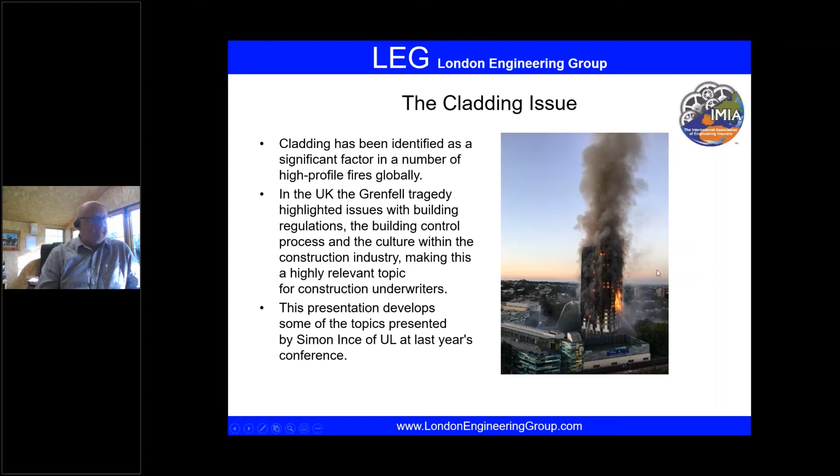So the paper itself considers the cladding types and technical aspects, focusing strongly on fire rating and types of insulation, and Mahmoon will talk us through that today. It looks at general risk management in terms of the influence and understanding of applicable building regulations, and the resilience of buildings that are impacted by their design.

On insurance coverage - it's interesting that cladding issues have impacted many lines of business, not just property, which is obviously very high profile, but also construction to a lesser extent, IDI, and professional indemnity. So we'll look at some of those issues, the underwriting considerations already mentioned, risk engineering, and I think what's really interesting - some of the claims statistics. We'll move on with claims as our starting point.

So the group identified 75 cladding-related fire claims since 1973. The earliest claim looked at is the Summerland disaster in the UK - the fire at a holiday complex on the Isle of Man killed 50 people and led to changes in the building regulations in the UK.

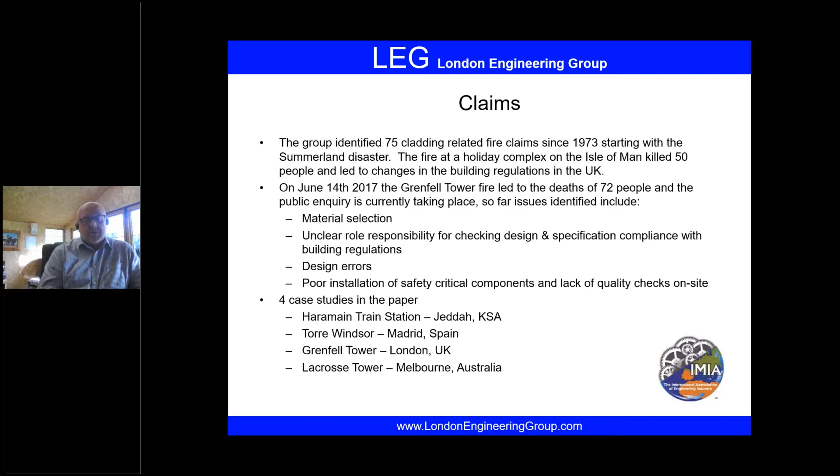We're looking at 4 particular case studies in the paper. Grenfell is one of them. The others: 2 construction losses - the Haramain train station in Jeddah, Torre Windsor, which is a slightly older loss in Madrid, Spain, and also the Lacrosse Tower in Melbourne.

Just to show that this remains a very relevant topic, we're aware of two recent claims that we've added to the log. A hospital under construction in Kuwait caught fire in September. We know cladding is a factor in that fire at the Al Sabah Health Zone in Kuwait City, and reports say it was also contributed to by poor material storage on site.

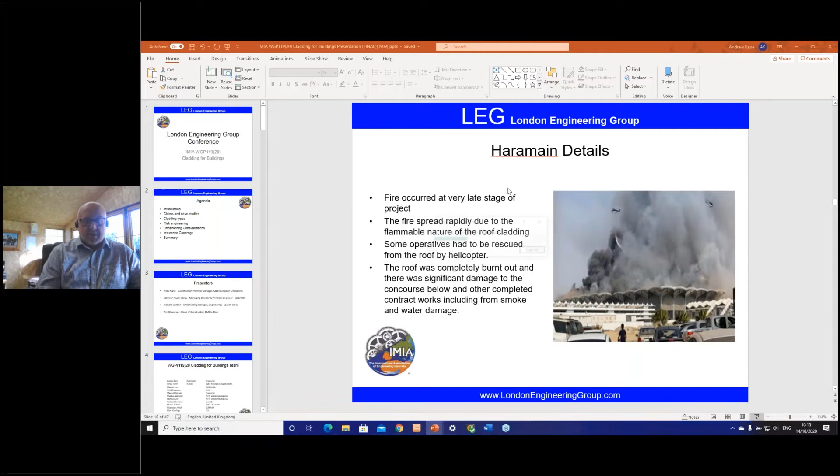And then last week, a rather spectacular fire in South Korea in an operational apartment building. We're going to see if we can get this video to work so you can have a look at it. Hopefully everybody can see that. Sorry, let's take it back to the start.

So this is a fire that spread very rapidly across multiple floors of this apartment building and hotel in Ulsan, South Korea. Fortunately, no casualties or fatalities as far as we're aware. You can see that characteristic of a cladding fire, burning debris showering down and floating around the area. This was a 33-story apartment building, and it looks like the cladding contributed to extremely rapid fire spread. It's believed to be aluminium cladding, similar to that in the Grenfell Tower.

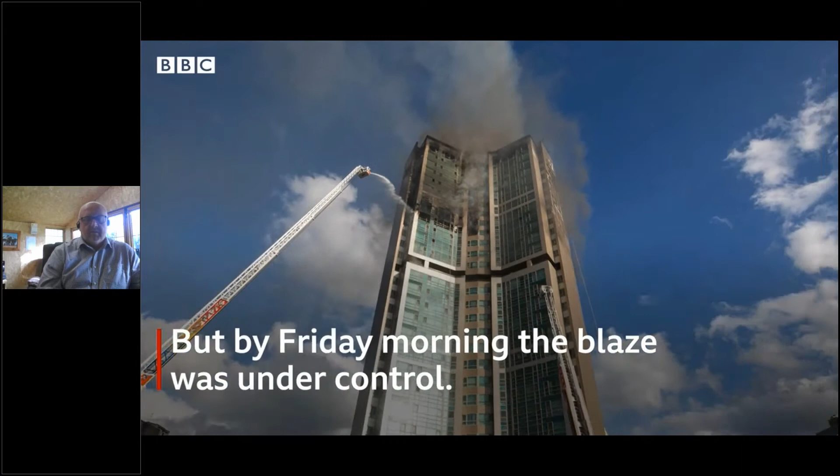One of the things we looked at was cladding fires over time. What you can see is that prior to 2007, there were not cladding fires every year, and they were relatively infrequent and rare. However, that may be because of lack of reporting or records not being available for more than the largest and highest profile losses. From 2007 onwards, there are recorded fires every year, and it looks to be an increasing trend when you look at the numbers per year.

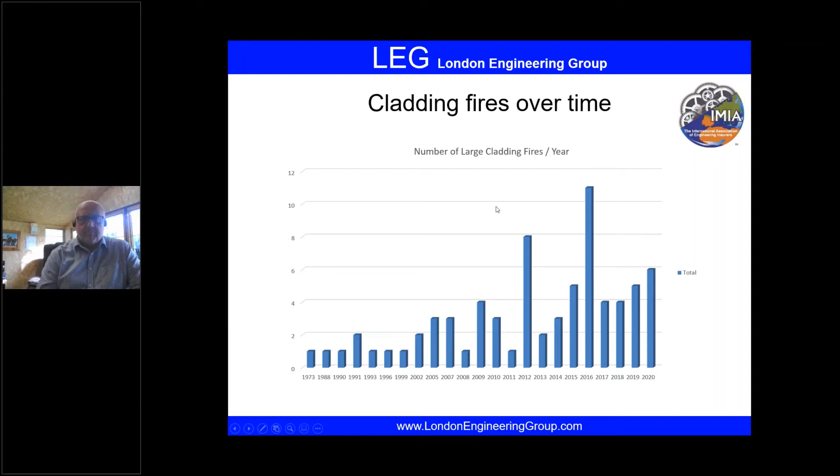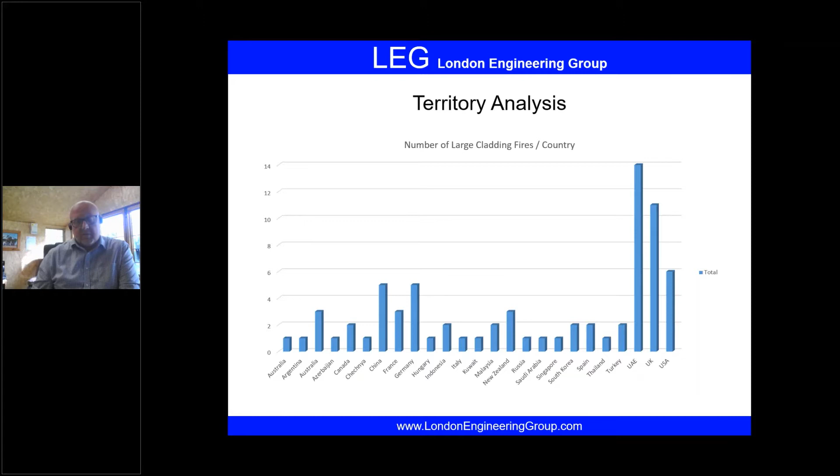In terms of territory, you can see that it is an issue that has touched many countries over the world, but there is a clear cluster of claims in the United Arab Emirates and also the UK.

When we look at occupancy, we could see that there are a number of occupancies that have been impacted by fires, but by far the highest are residential and then also industrial. So we would always potentially consider residential as a lower risk fire occupancy for construction, but you can certainly see that it has a high incidence of cladding fires.

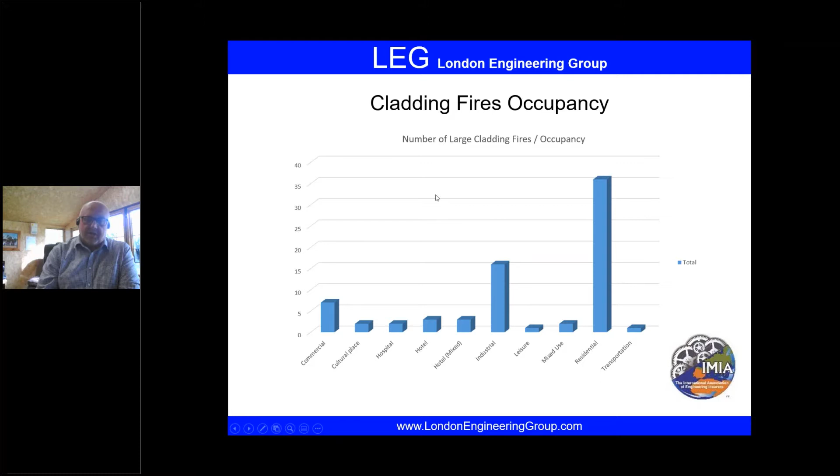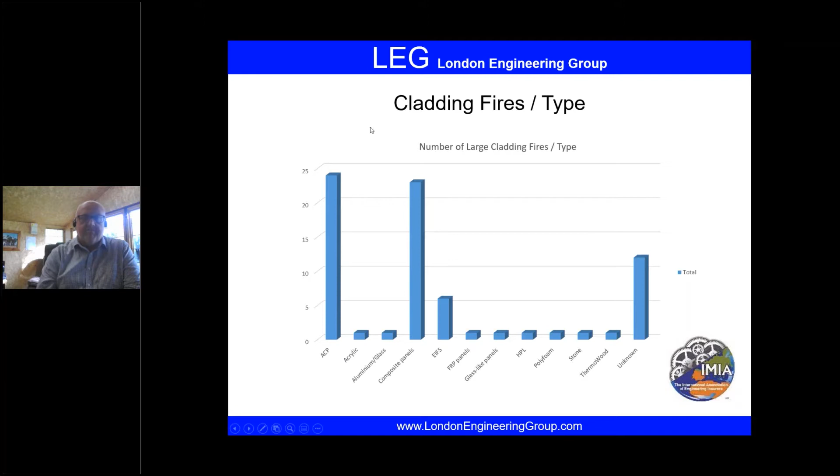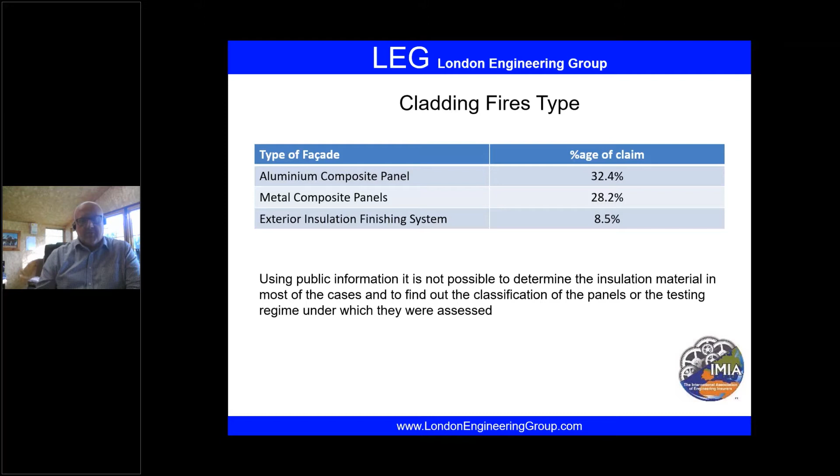In terms of type, this is harder to determine accurately because we're taking everything from publicly recorded information, but you can see that aluminium cladding panels and what are described as general composite panels feature significantly in the large fire database. There you can see that the aluminium composite panel is approximately a third of the claims, as are the other metal composite panels. Similar with exterior insulation finishing system coming up on third. As I mentioned, it was not possible to determine the insulation material in most of the cases, or to find out the detailed classification of the panels or testing regime under which they were assessed.

So with that, I'm going to hand over to Richard Gordon, who's going to talk through one of the case studies in the paper, the Haramain train station in Jeddah. So Richard, will you be able to turn your camera on and unmute yourself? Yes, indeed. Thank you, Andy. Thank you very much, and good morning, good afternoon, good evening all.

I'm just going to discuss the Haramain station risk and the fire incident from September 2019. The Haramain station railway is part of the 7.3 billion scheme that was partially inaugurated in 2019, and it connects the Muslim holy sites of Mecca and Medina with the Red Sea city of Jeddah, with high-speed trains traveling up to 300 kilometers an hour. The project aligns with Crown Prince Mohammed bin Salman's vision for 2030, and there's a lot of ongoing change in Saudi Arabia, making it a very exciting country for the future.

So the fire happened at a very late stage in the project. Some of this may be approximate detail, but the project was virtually in handover mode and ready to be put into an operational BI program. What happened was there were ongoing elements of work going on the roof, and that, whatever contributed, started the fire. What is quite scary and frightening is the speed at which this fire spread throughout the structure. We've been talking about vertical cladding, but this is actually horizontal cladding, and I'll show you in the next picture how the landscape of the roofing configuration looks like.

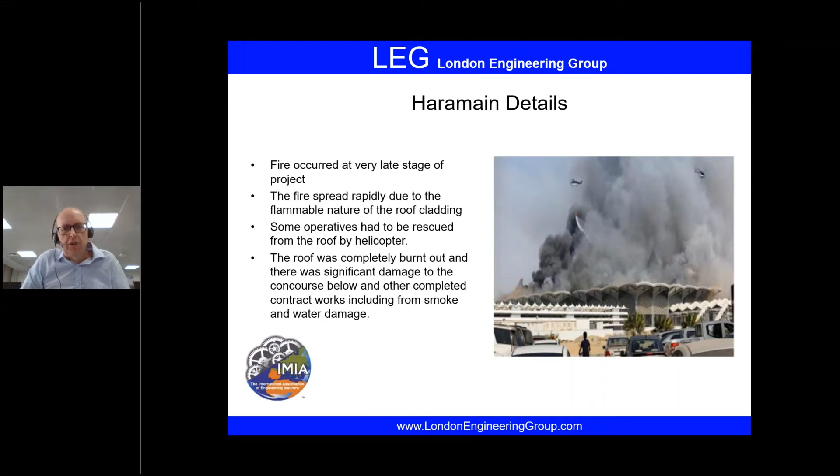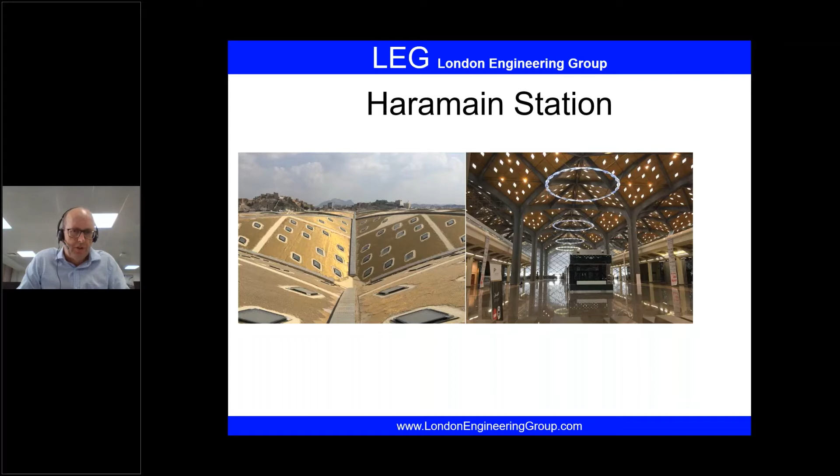Now let's talk about the impact of the size of this fire loss.

Going back to the picture, the roofing material was combustible - expanded polystyrene foam and polyurethane components. There are no actual breaks in the structure or uniformity of the panels. So with no fire break, strong winds, and a source of ignition, the fire completely burnt through.

Now the station will have to be rebuilt, as it's part of many similar structures on the project, within the time frame of this project which started in 2011. Saudi Arabia is also changing its cladding specifications and civil defence building specifications.

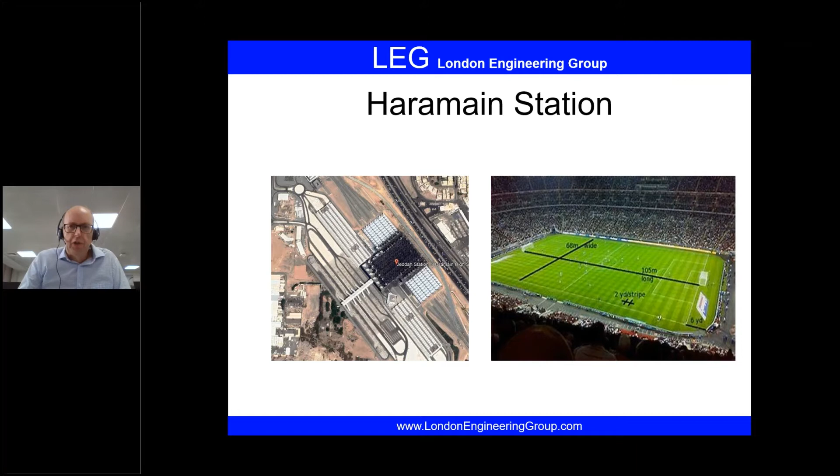What I'd like to do now is show you a couple of videos of the project, taken from YouTube. One shows the fire ongoing - Andy will drag through to the key elements.

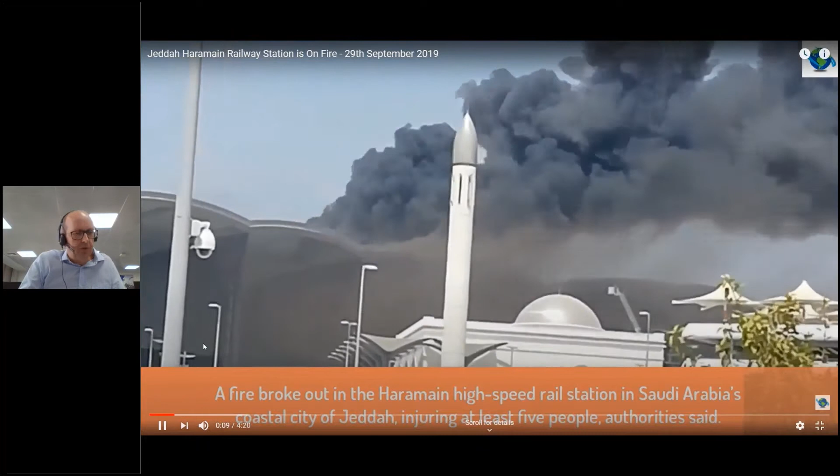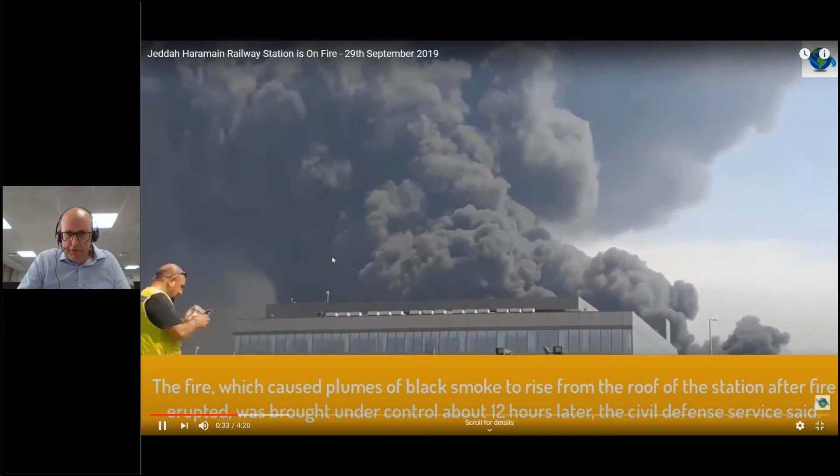We won't have sound, but you can see the black, acrid, toxic smoke, high heat release, and intense, fast spreading fire. It's very corrosive and toxic, difficult to put out, and it burns just like petrol and gasoline.

I think it was a burnout philosophy really once the fire brigade arrived on site. Fortunately the best news is that loss of life did not happen, but people were taken to hospital, and there were people rescued off the roof.

It's quite frightening how this happened from a simple, possibly innocuous hot working process going on the roof structure at the final stages. And it burnt all day and all night.

So the next video is when the fire brigade and people actually gain access to the destroyed concourse location.

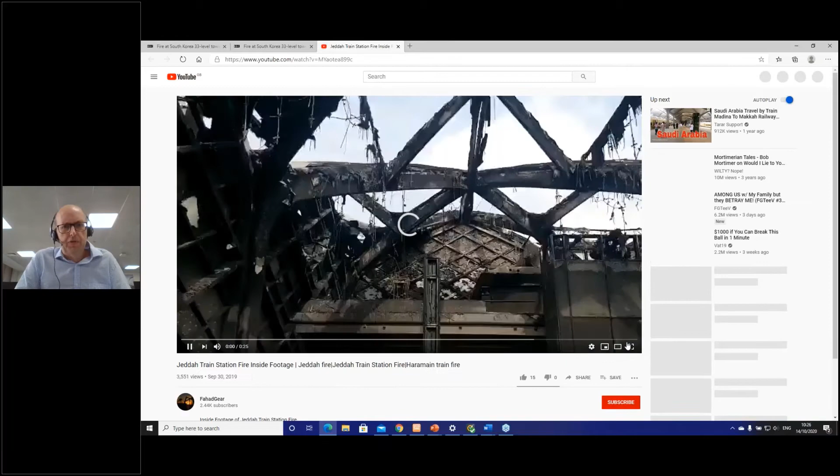What should also be said is that the project was in its final stages - you can see the ticket machines. I'm aware of claims not only to the construction project, but also to utilities and providers for the permanent works under our operational program. If you get access to this presentation afterward, you can listen to the sound of debris and people walking along - it's complete destruction.

The consequences are that it has to be rebuilt, with insurance coverage for the rebuild to new standards and all the various criteria the principal has to decide. Then we have the consequence where we come in as underwriters and insurance people with the insurance policy for the rebuild. I think that's just a snapshot of how serious it can get.

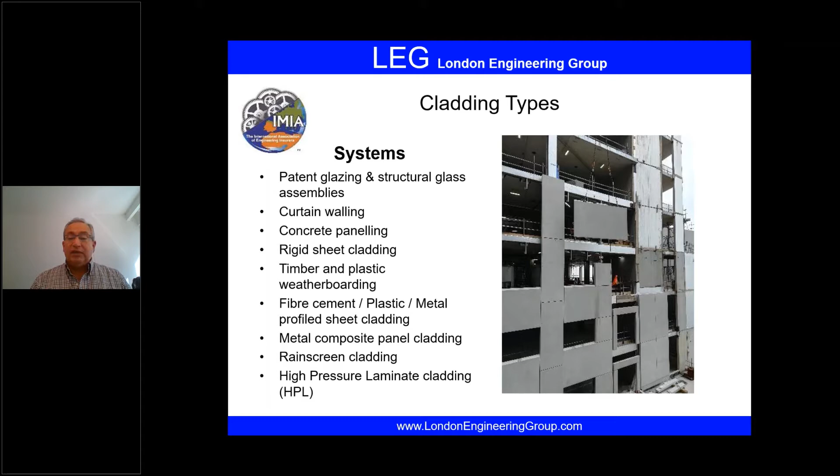So on the next slide, we come to really define what the problem is and where we need to worry. We need to worry about a certain type of cladding with a core that is made of a material that is combustible. Now, not all of it has to be aluminium composite panels.

They don't always have to be aluminium. In general, when we talk about cladding of concern, we're talking about a composite panel, or what is referred to sometimes as a sandwich panel. Basically, we have two thin layers of metal, and right in between that metal, we have a core material that is used to actually provide some sort of strength and protection against wind loading in the material. So it is a construction component that is very, very important for the construction, and it provides quite a bit of protection to the building.

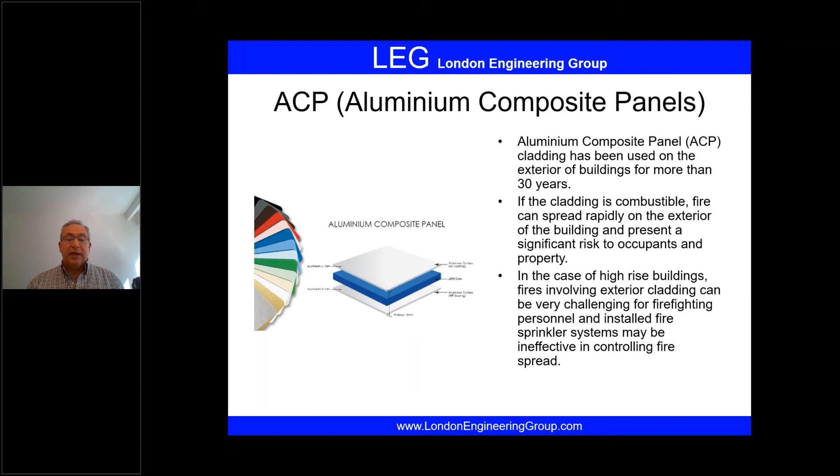The problem, or what we really need to worry about, as the next slide shows us, is the core material. What is the core material that is used? Before we get to that, let's go into the different types.

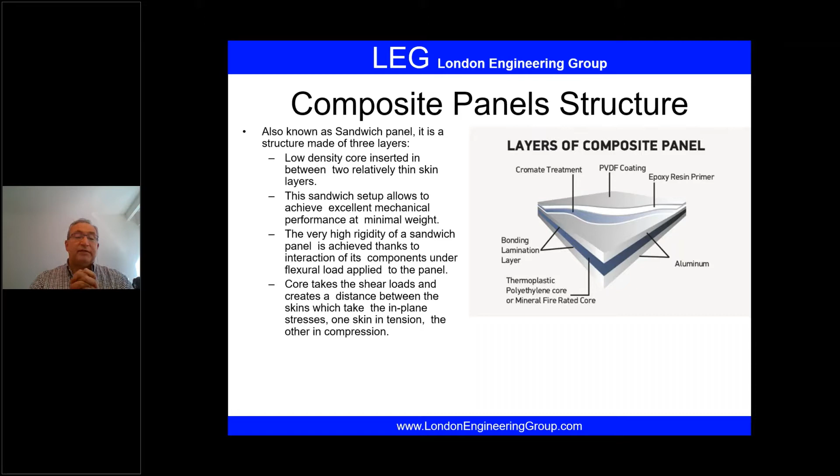Let's talk about where do we expect to find these composite panels. Some of them, and the majority actually, are found outside on the external cladding on buildings. There are different types of cladding and different types of material, but they are very, very common on the outside.

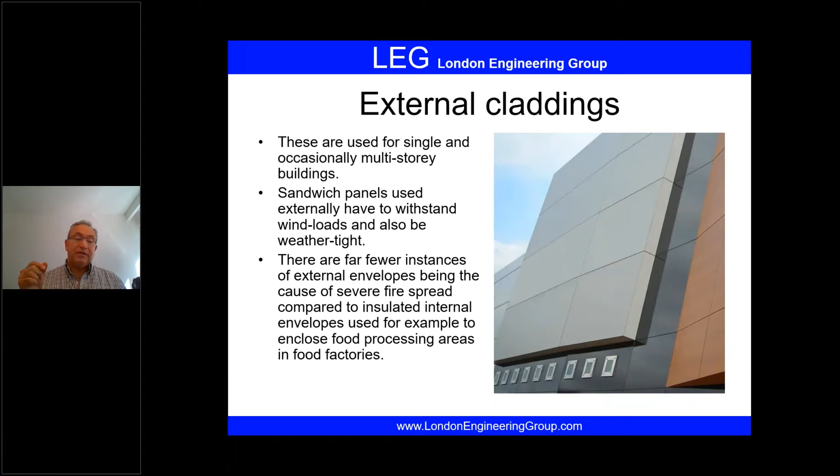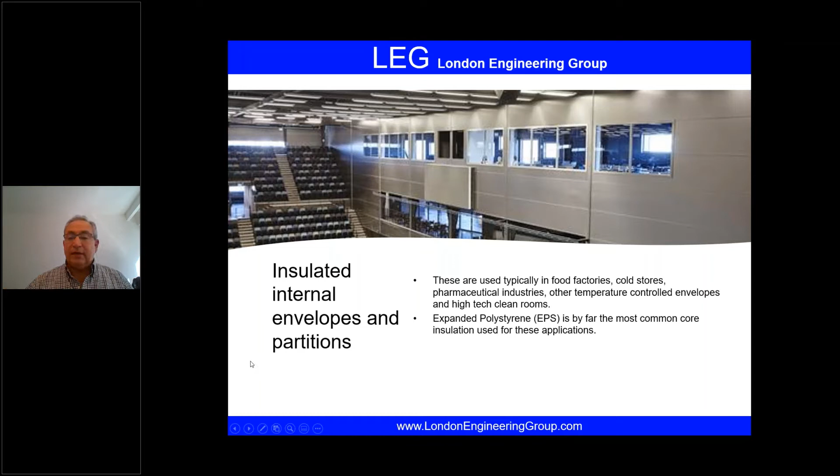Now let's go and start looking at the type of core. There are many different types of cores. We worry about two or three of those that tests have shown are very combustible and have very little fire resistance. Unfortunately, they are the most widespread, or widely used, in the industry because of how cheap they are and how rigid and good quality they can provide to the building. Let's look at those one by one.

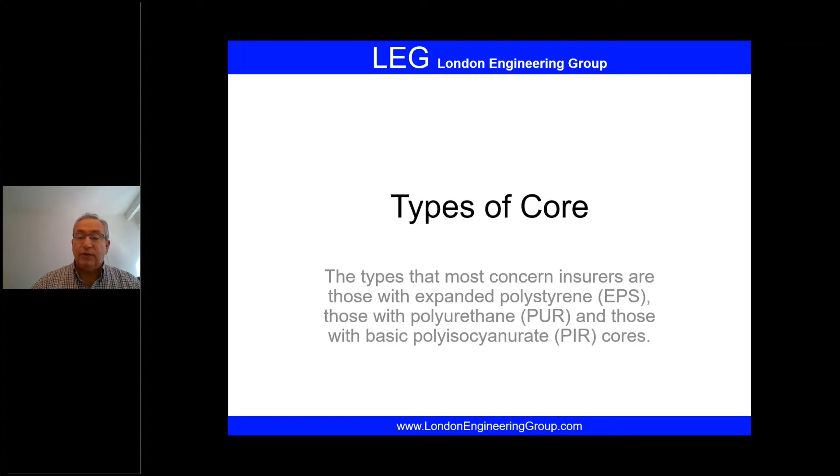Let's start first of all with the polystyrene. The polystyrene should always be treated as combustible. As I describe these cores, I'm going to try to mention some testing standards we need to be aware of. These testing standards and their results we took out of the presentation, but they are going to be in the paper, which talks about the testing standard and how it applies. That's really important to keep in mind, because there are quite a bit of different testing standards, classifications, and descriptions of this material. EPS is by far the worst because it has absolutely no fire resistance. It feels very similar to packaging material - if you order something and it arrives, it will have that polystyrene inside it. Unfortunately, it is very common and used quite a bit.

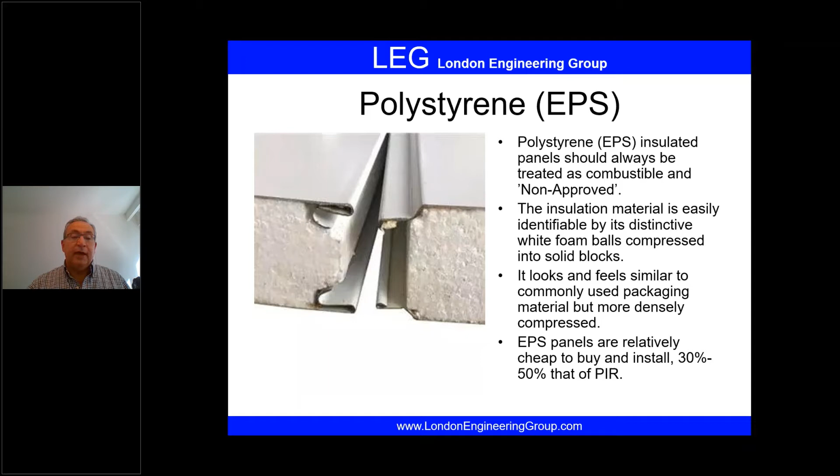After that, we talk about the polyurethane. In some instances, the polyurethane is actually a little bit more dense and a little bit thicker or heavier. Because of its density and the type of material, it does actually provide some fire resistance, but nothing to speak of - nothing really serious to acknowledge or think of as fire resistant or fire retardant. Now, it is sold as panels with enhanced fire resistance.

That's a term that is used by some manufacturers. It doesn't really mean anything in terms of testing results, in terms of fire resistance, and in terms of the ability to resist fires and to provide any protection. Remember, we talked about testing standards that have to be met, and testing standards that decide if the material is good and applies, is combustible or non-combustible.

Unfortunately, as these panels are sold, and we have run across this situation in many places and many countries, they are often sold and presented as either fire retardant or fire resistant. Nobody says it's non-combustible, but they add these little terms on them and they don't mean much.

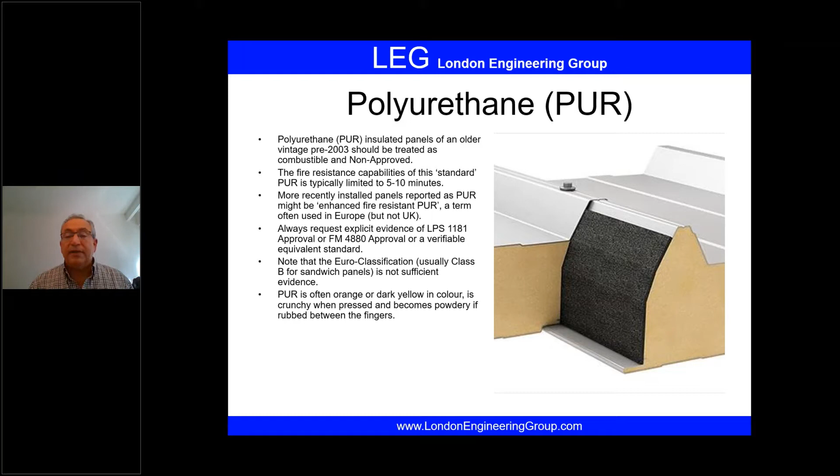If we look at these two types and the burning characteristics for the EPS and the PUR, you'll notice that when these panels are exposed to fire, the adhesion holding the thin skin panels around the core starts breaking off and getting consumed, and starts failing. When the panels or the metal start opening up, the core catches fire and spreads very aggressively. In most cases, with these two types, the buildings become involved in the fire very quickly, and you can bet it will be a total loss, especially if you find them on the walls, outside and inside, and also in the roof panels.

So when you find them in all these different locations, once they catch fire, just like Richard demonstrated in the case in Haramain, you will notice that it will spread very rapidly and very aggressively. It is very difficult for the fire services to actually control it.

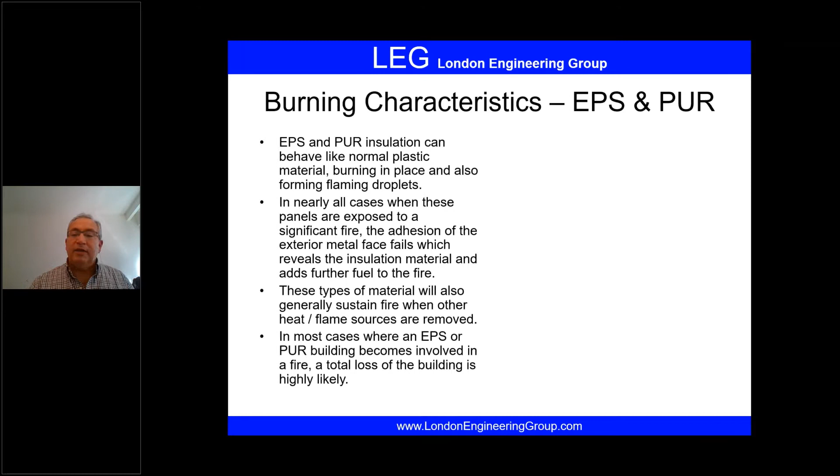Now we come to the PIR. The PIR is better. It's a form of polyurethane with significantly increased levels of fire retardant. Most PIR panels, underline the word most, not all, will actually be LPS 1181 approved and/or FM 4880 approved. Again, in terms of a construction project, we need to actually request and see evidence, because not all are approved. The majority of them, or many of them, are approved.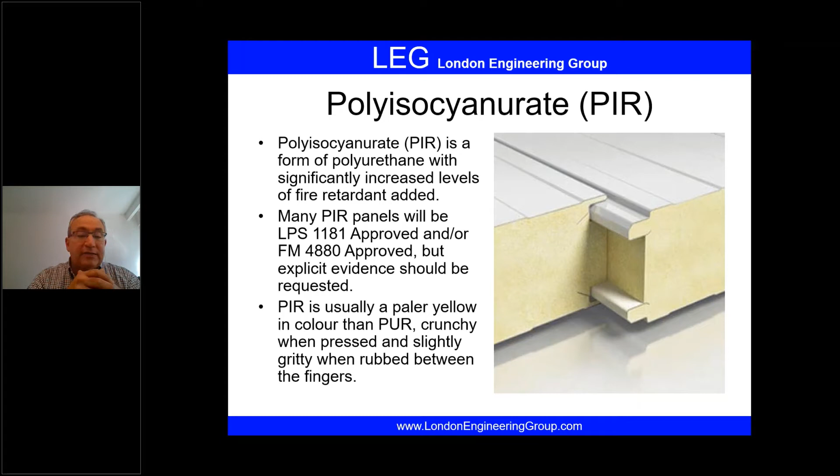The burning characteristics for the PIR in the next slide will actually tell you quite a bit of what you need to know about it. It has a much better fire performance than the EPS or the PUR.

Because of time constraints, we have to take this testing information out. But fire performance relates to several characteristics. One is how long before it catches fire. When it catches fire, how quick does it spread? And one very important characteristic, which we have observed in most cladding fires, is how much it will spread the fire. Does it form burning droplets that will actually spread the fire beyond the building to adjacent buildings and other locations?

Like Richard showed, the ticketing area inside the Haramain station, all of that was from falling debris or falling burning material, which caught additional fires and caused damage to other parts. So the burning characteristics are always studied in terms of these testing results, and you can decide if the material has good burning characteristics or not.

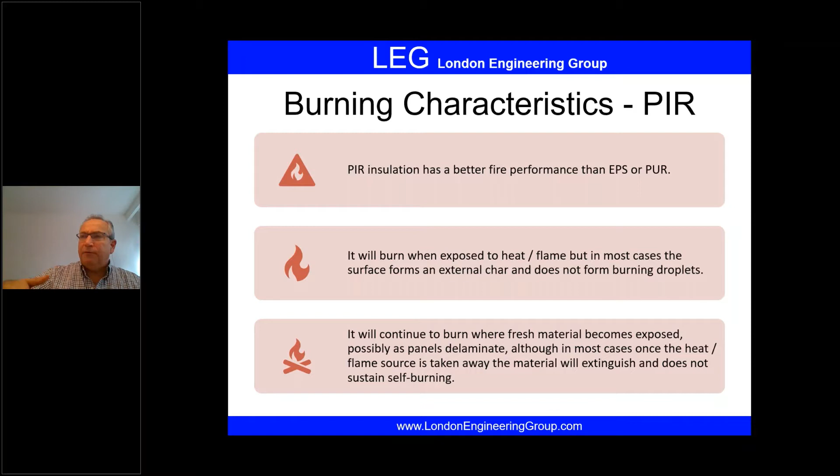Now, in the next slide, we bring in the material. Not all material is a problem. We have material that is really, really good, modified phenolic, MPhen. This is material that is actually approved, most or all of it, and it's treated as an effective non-combustible core. Guess what? It's very expensive as well. So not a lot of contractors or suppliers or projects would actually have it put in.

So that's where you really need to find out what is the type of the material and whether it has been tested, or does it comply with the standard.

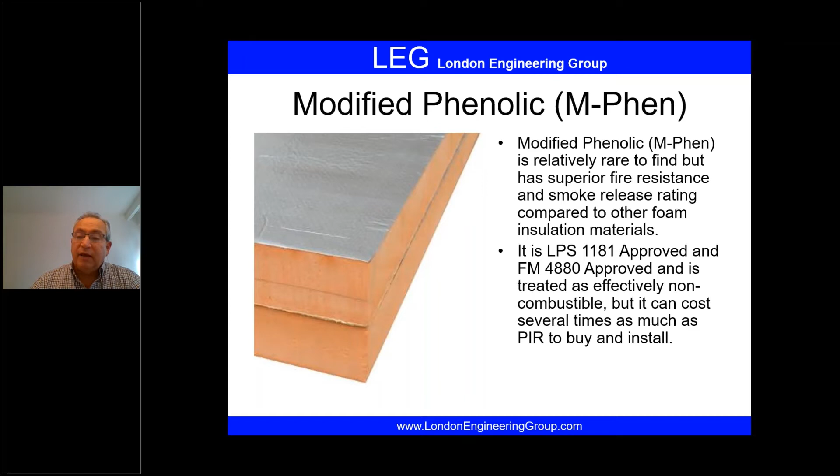Another kind, which most of us are aware of, is mineral wool. Mineral wool is a type of insulation made of stone wool and glass wool, and it is non-combustible. So it's very, very good, excellent insulation. It's heavier, and at the same time it's also very expensive. That's why you don't find it as common.

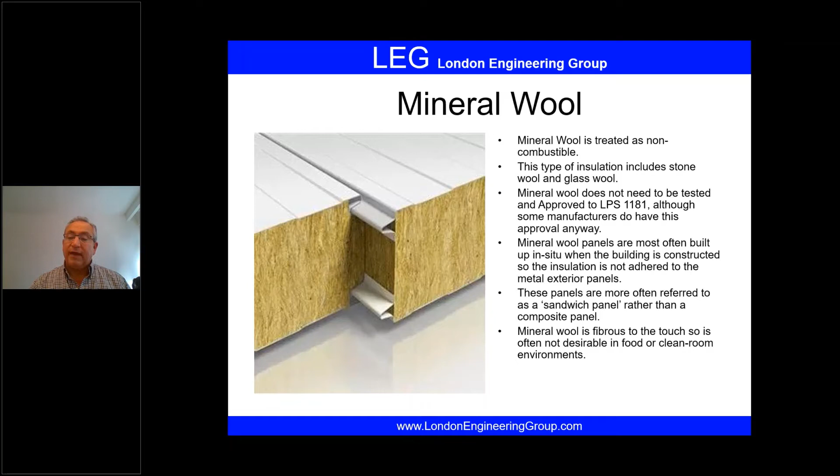Now, if you look at the burning characteristics summary on the next slide, you'll see the test results. You probably won't be able to see this because of how small it is, but it will be in the paper. It's a published table that compares these different types in terms of cost and fire resistance in minutes—how long before it ignites and breaks away or disappears. It will catch fire, but what happens to it? How long will it provide some resistance? And what's the probability of fire spread, based on whether the fire grows within the core or the panels themselves, and whether it starts dropping burning droplets or parts that ignite fires in different locations.

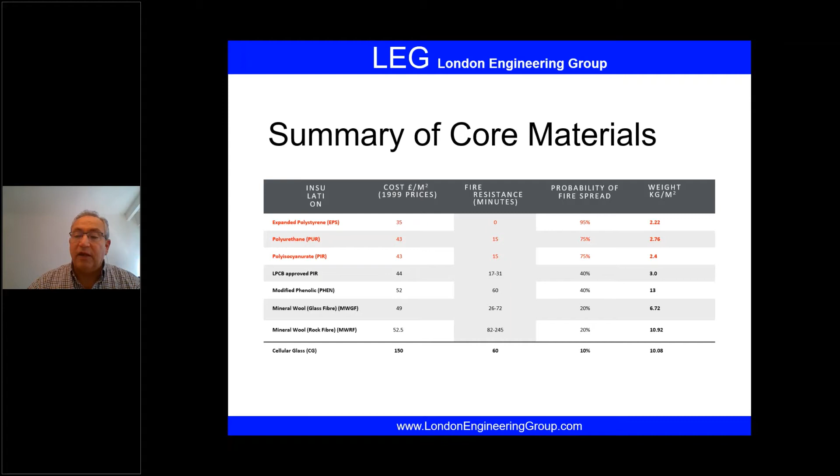So what do we do as risk engineers? How do we tell? If it's under construction, it's very easy—we just ask for the certificates, look at it, and decide what's going on. We go to the warehouse, look at the type of panels, and see it.

But sometimes we're dealing with situations where we can't do that because it's an existing building. It's very difficult to look at a building and decide what the core type is. I've had that problem, and I'll go around looking for somewhere that someone forgot to fill in an opening, just to peek in and see what material is being used. I typically look at openings in the wall for fans in warehouses, or windows, where you can look inside and decide what the material is.

And that is the difficulty, because in most cases when I ask somebody, 'Can you show me the certificate for the panels,' even in recently built warehouses and buildings—as recent as 5 years or less—nobody has the information. Nobody knows what's actually going on, and nobody has anything they can share.

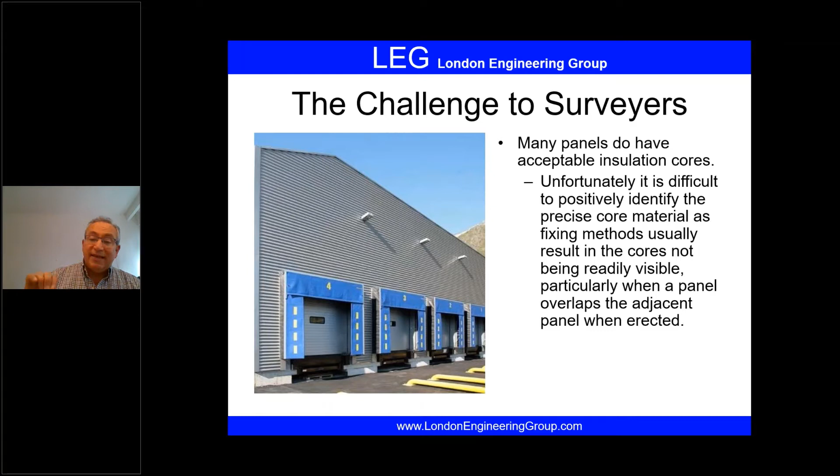So to assess the risk, and this is very important, we need to determine what the type is. We need to establish it one way or another. We need to try to find it. If we don't find it, we need to go and start asking questions. In many cases, especially recently, you will find a lot of that information available in various locations.

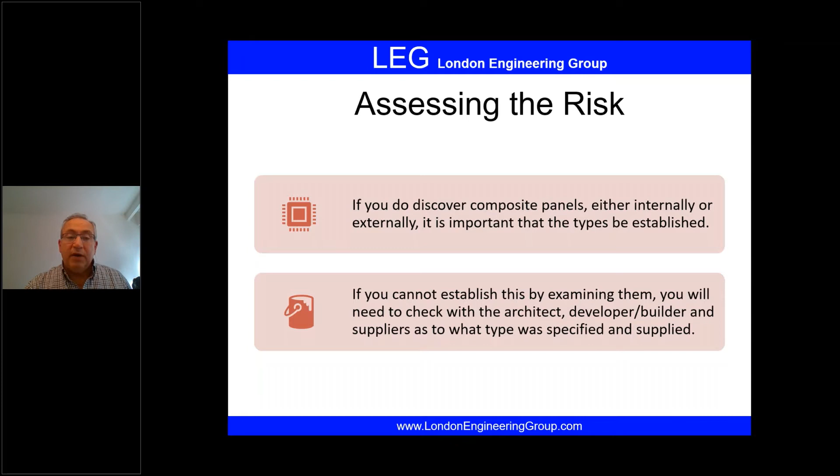I just want to remind everybody that the fire problem is not a cladding problem. The fire problem is a much bigger problem. Cladding is only part of it. Compartmentation, fire protection, occupancy—all of these things are part of the fire problem, and it has to be considered that way. We can't just focus on the cladding and say, 'Oh yeah, it has mineral wool cladding, therefore this building is safe.' There's a lot that has to be considered—how the cladding is installed, what it does, and how it does it is very important.

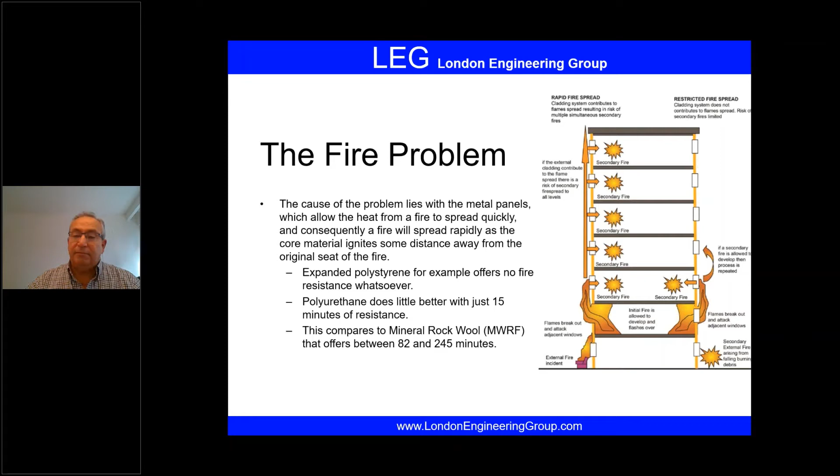Now, a lot of people and underwriters will ask whether it meets building regulations or not—that's very important. Through investigating some serious fires in different countries, we've discovered not all regulations have been updated. Regardless of all the high-profile cases that have taken place, and everybody knowing about the problem, not all countries have actually updated their building regulations. Building regulations in many countries remain behind on that situation. It's unfortunate, but that is the fact of the matter.

In addition, we also have problems related to manufacturers using terminology that doesn't really represent the facts. So there are a lot of things to consider. I'd suggest you reference the testing parts and testing standards in the paper we've captioned, because there are so many of them—it's not just a British standard, not just European, Euroclass, or an international standard. There are so many, and they all test different things and report in different ways, so you really need some understanding of how these apply and work together.

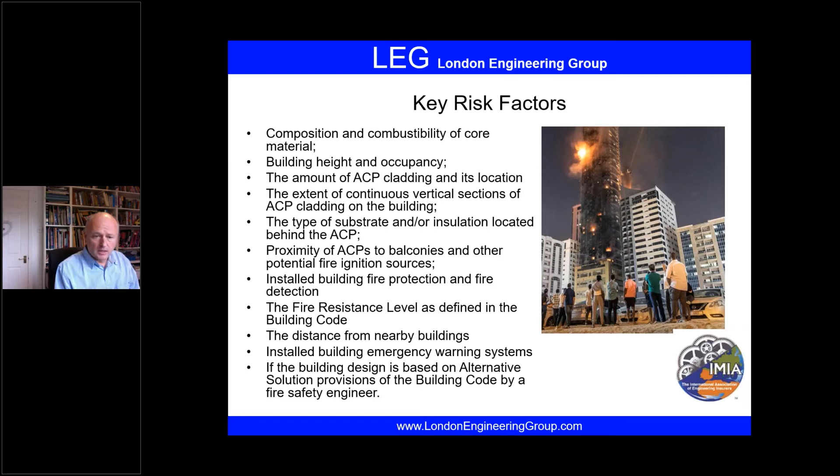So if you're looking at cladding stability and issues of waterproofing, then you need to have a good view as to who's done the wind testing and are they reputable.

Now with a high-rise building, with cladding, there's going to be repeat design. So it could be one panel, one fixing that's repeated throughout the structure. So you should consider repeat losses, or is a series loss clause applicable here?

And consider issues relating to the cladding panels if they're not fire resistant, or if they're below fire resistant. If you have that, then there's a greater likelihood of the cladding catching fire in the first place, but also through spreading throughout the building.

And if you look at your PML scenarios, if your building comprises of several buildings, there's a higher potential for fire spread between the buildings because of more intense heat, and the likelihood of the cladding on adjacent buildings will be more susceptible to catching fire. So that could alter your fire PML scenario.

And with a fire inside a panel, it might take longer for the site team to be aware of the fire. And once they are aware of it, it can be very difficult to put it out because it's within the aluminium cladding. And when we look at the manufacturer, do we know the name of the manufacturer?

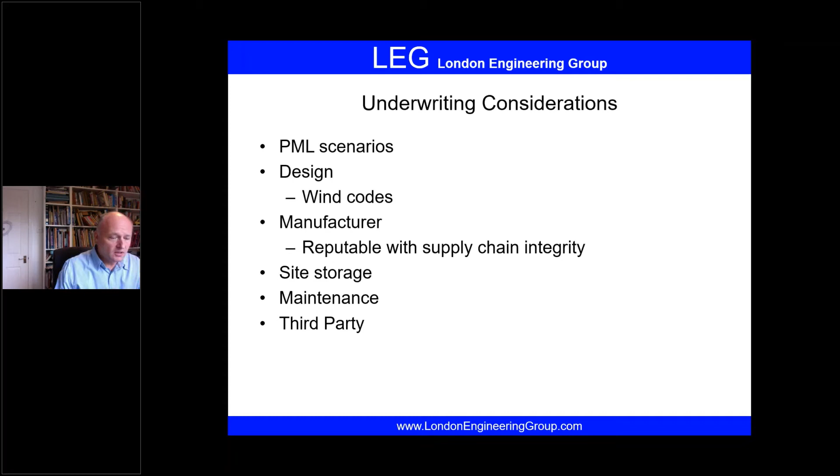So what this shows is that the exposure is not just to property and CAR insurers, it affects many other lines. So if we go to the next slide.

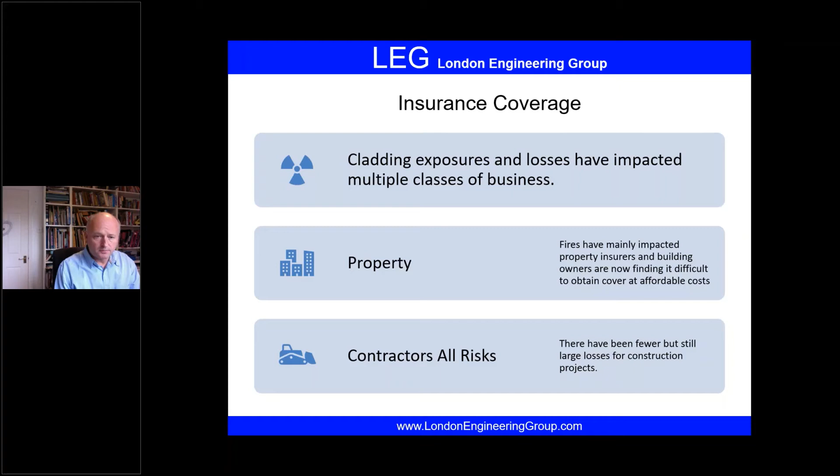Inherent defects: if we had defects in the cladding, inherent defects cover will cover you for 10 years after construction of the building. Depending on the maintenance and CAR cover, there will be some overlap - if you have maintenance of 2 years, there's an overlap with the IDI. Within IDI insurance, a likely scenario is cladding replacement, or certainly water leakage and repair of that.

You've got liability exposure too, so third party exposure seems obvious - panels dropping, etc. But it's very real, and professional indemnity cover could also be affected if there are defects in the design.

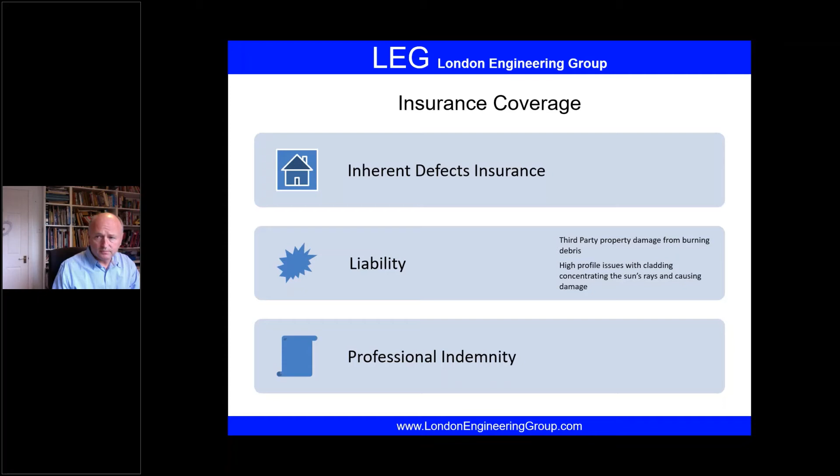So in summary, there are many different types of cladding. We've seen you can go from what seems to be the most exposed to fire, polystyrene, right through to mineral wool and MWRF, which are much more resistant. Design factors, material selection, installation and quality have a huge impact on the potential for loss - on the likelihood of a fire occurring, and on the extent of damage that can result when it does occur. Local building codes vary significantly, and built to code does not necessarily guarantee fire resistance. Building procurement needs to encompass firstly life safety, but also long-term resilience, and building owners need to consider ongoing risk management requirements, continuing right through into the operational phase of the building.